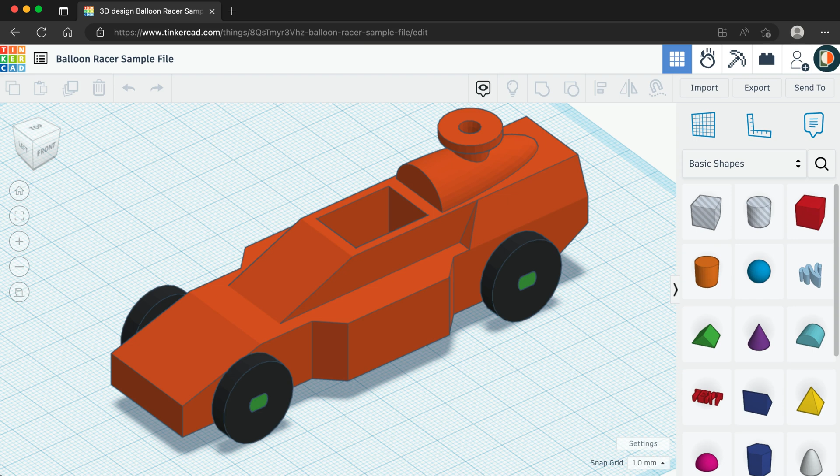This balloon racer sample file was designed in Tinkercad and previously sent to Fusion 360. We're now ready to refine and modify the model with Fusion 360's toolset. I'd like to make this design ready for 3D printing.

Before we get started, let's right-click on the top-level assembly and select Capture Design History. This will turn on the parametric timeline and record all of our steps, allowing us to update features and dimensions later.

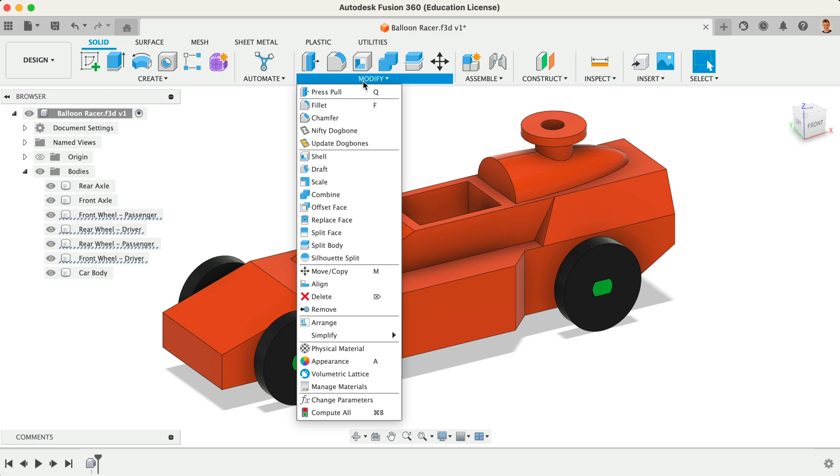We can use the Offset Face command found in the Modify menu to increase or decrease the size of existing 3D bodies. Let's increase the size of the wheels. Start by selecting the outer face of each wheel. You can use the view cube to reorient the model as needed.

Once selected, I'll define the offset as 4 mm. Notice this increases the outer diameter of each wheel.

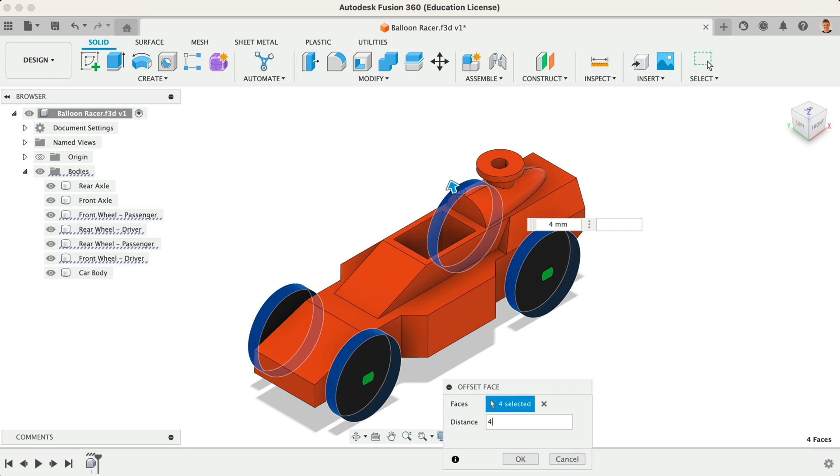We can also use the Offset Face command to add clearance between the axle and the car body. I'll hide the wheel and axle 3D bodies by selecting the visibility icon in the Fusion 360 browser. With Offset Face active, select the two inner cylinders.

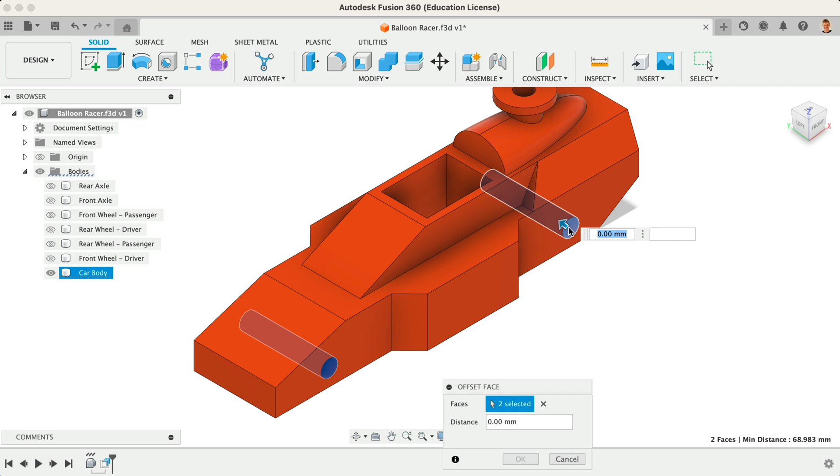We'll define the dimension as negative 0.1 mm. The minus symbol will ensure we subtract from the existing 3D body. If I turn the axle body back on, you'll see there is now a clearance between the two parts.

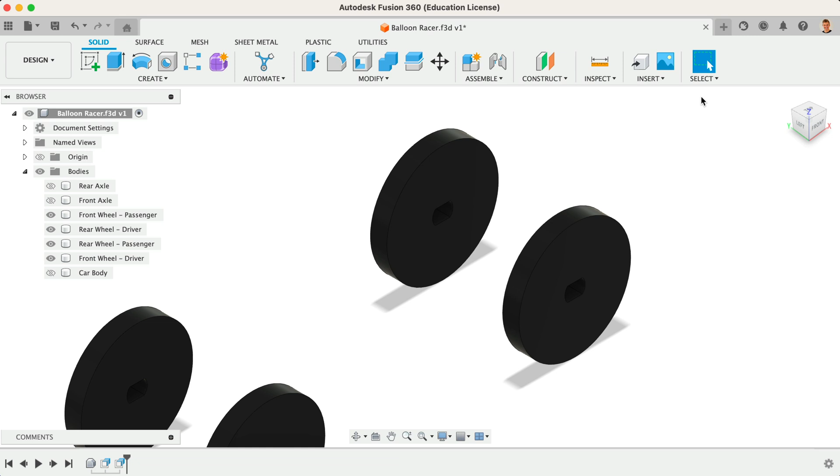I'll also add a small clearance to the inner cutout on each wheel. I'll hide the axles and turn all 4 wheels on. With the Offset Face feature, we'll select the 4 inner faces of each wheel.

Once all 16 faces are selected, I'll define this offset as negative 0.05 mm. This provides us with a total offset of 0.1 mm since it's going in both directions.

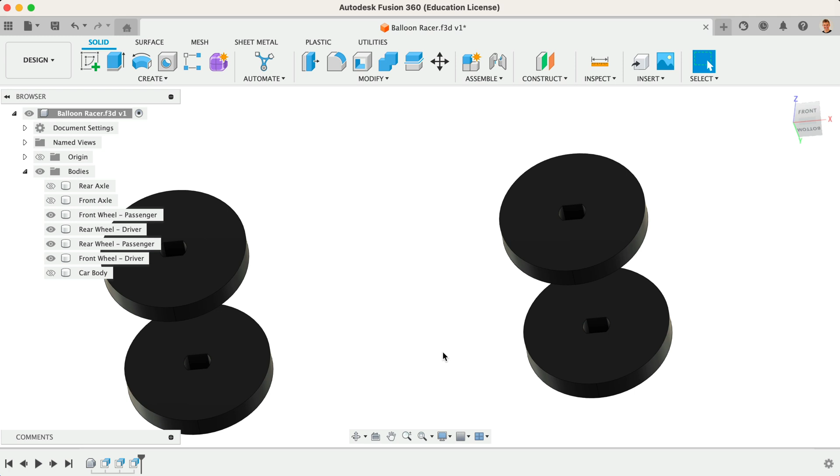To reduce some of the friction on the wheels, we can add a beveled edge with the chamfer tool. Select chamfer from the Modify menu. We'll then select all 8 edges of the wheels.

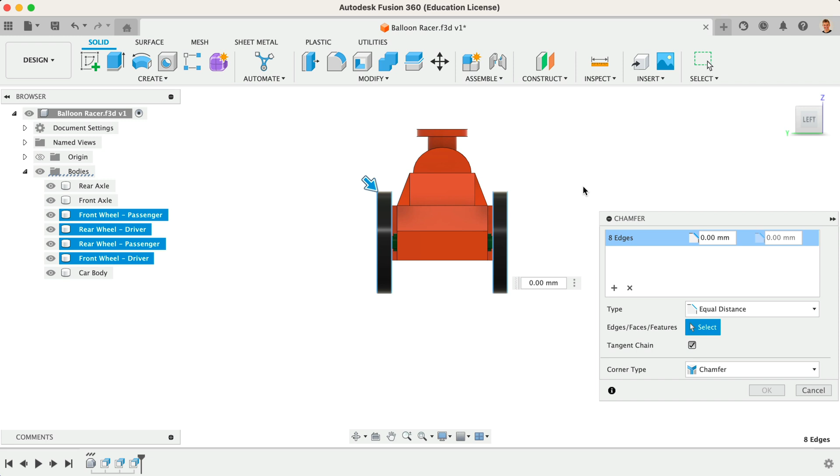Looking at the car from the left view of the view cube, I'll test out some different chamfer values. 1 mm appears to give us the desired result as the wheels will be 3D printed lying on their side. This 45-degree angle can be 3D printed without any issues.

Notice our features are being recorded in our parametric timeline. At any time, we can double-click to edit an existing feature, allowing us to change the value.

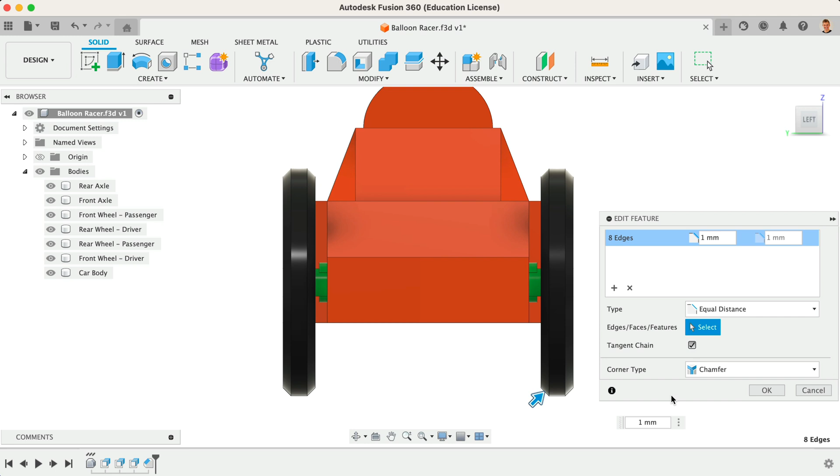While chamfer applied a beveled edge, we can use the fillet command to apply a smooth rounded edge to any sharp corners. Fillet is also found in the Modify menu. Once active, we can select any of the sharp edges.

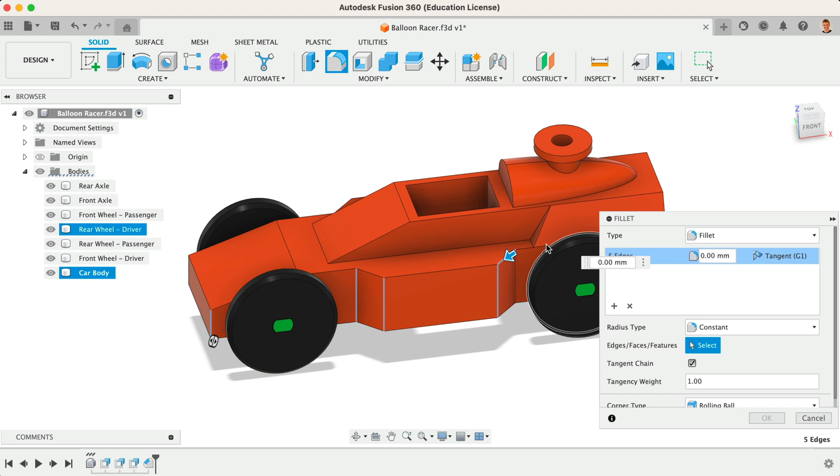I'll start by selecting the 5 vertical lines on each side. Use the view cube to reorient the model as needed. I'll also select the top edge before defining the fillet as 5 mm.

In the fillet dialog, we can add a new selection set, which allows us to add additional fillets with a different radius. For example, I'll select the sharp edge near the front of the car, defining this as a 20 mm radius. At times, you may find it works best to apply additional fillets with a separate fillet command.

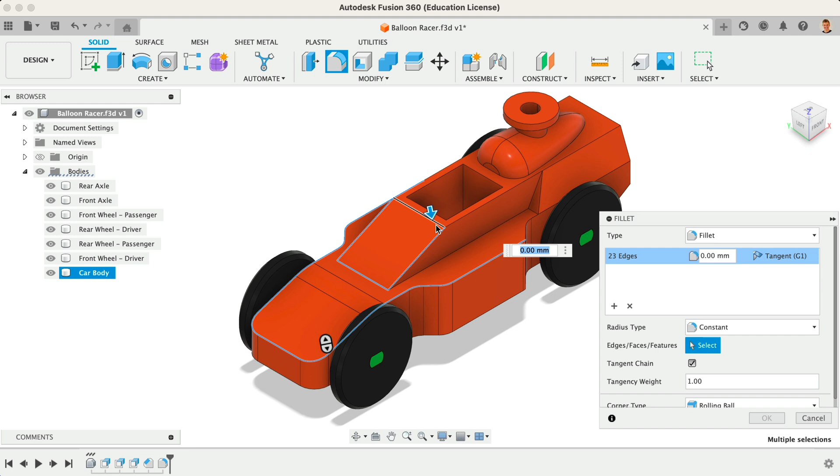Let's click OK to save this one, and we'll reactivate the fillet command. This will help us avoid some common fillet errors where the radius cannot be applied due to the surrounding fillets. This time, I'll select all of the remaining sharp edges, followed by a 1 mm fillet.

Lastly, I'll add a new selection set with a 0.5 mm fillet to the top of the balloon holder and the opening.

The overhang of the balloon adapter may not print well in its current state. Let's double-click on the original chamfer in our timeline. This will allow us to add a new selection set, and we'll select the bottom edge of the adapter. I'll define this chamfer as 1.5 mm.

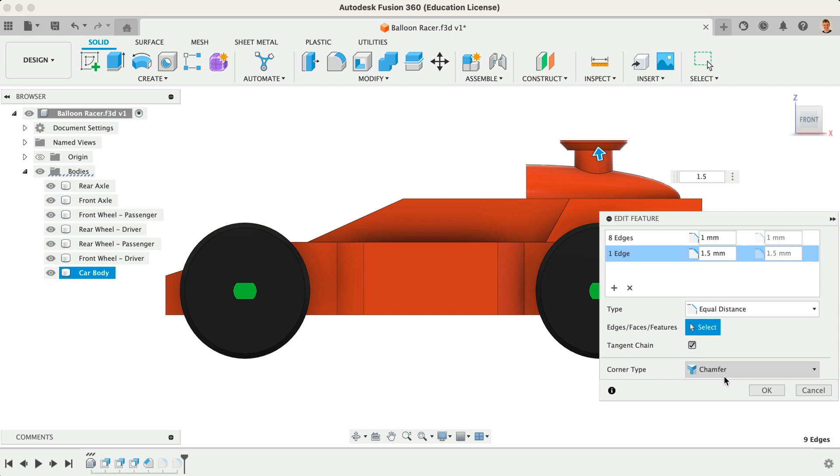We could also offset the face of the stem, making this larger for the opening of the balloon. I'll offset this outer face by 1 mm.

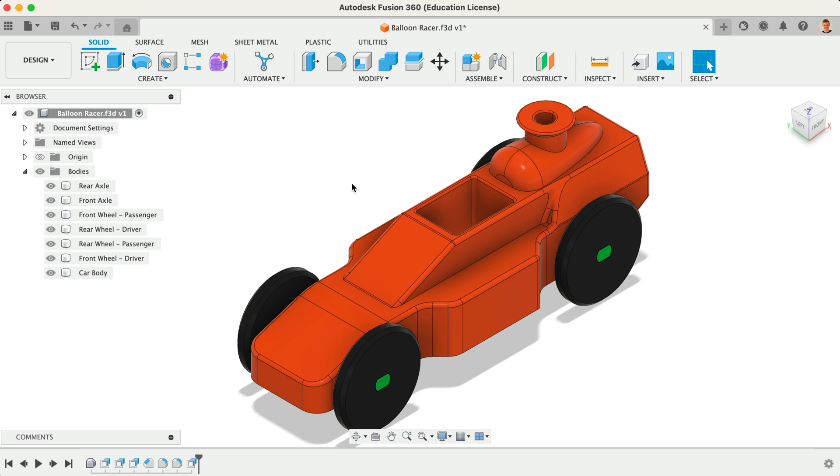Our car is just about ready to 3D print. The last thing we may consider is reducing the weight of the 3D print by hollowing out the underside. This will help ensure the car can be moved by the balloon. Fusion 360's shell command, found in the toolbar or the Modify menu, helps us hollow out existing 3D bodies.

Start by selecting the bottom face of the car body. We'll then define the desired wall thickness, such as 1.25 millimeters. If you receive an error message, try using a different wall thickness.

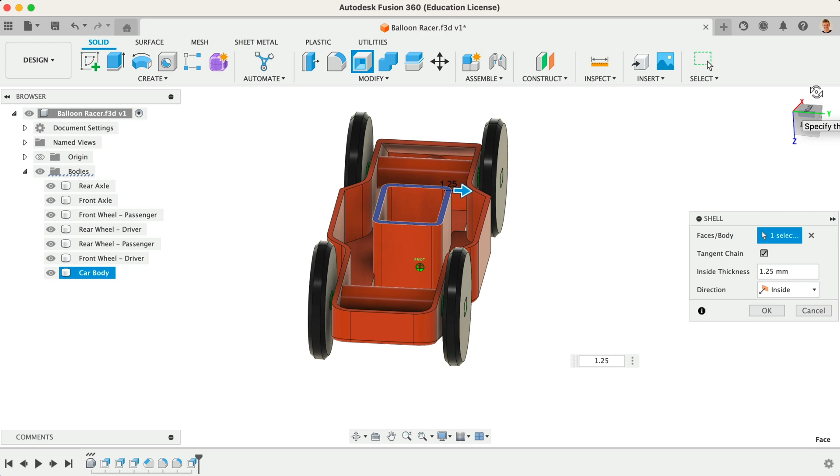Notice this removes all the extra material beyond the defined wall thickness. We will have to 3D print this with supports. However, the reduced material will ensure the car is not heavier than the balloon can handle.

Our balloon car is now ready to 3D print. In less than 10 minutes, we were able to refine and modify our Tinkercad file using Fusion 360's design tools.